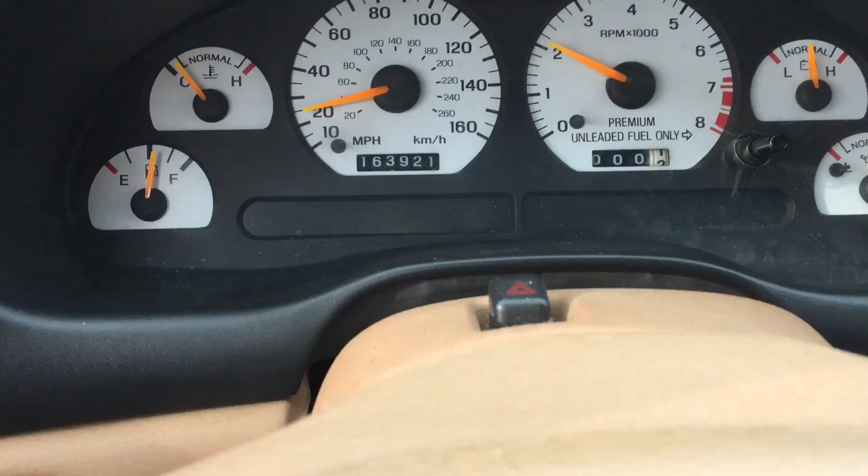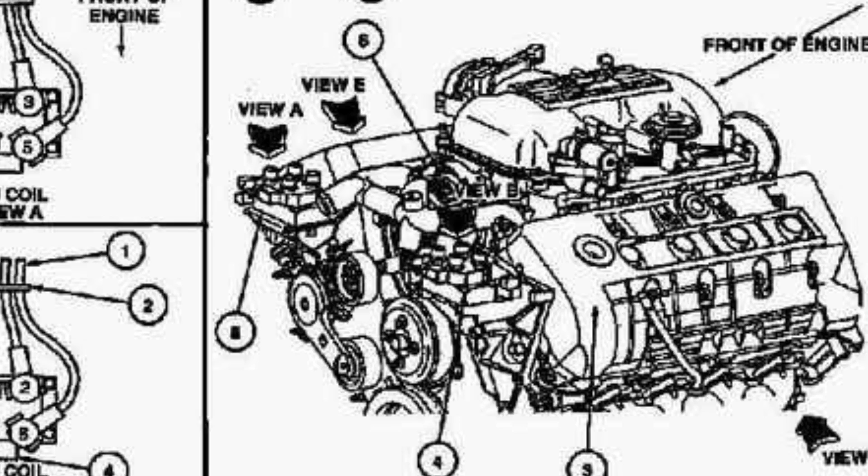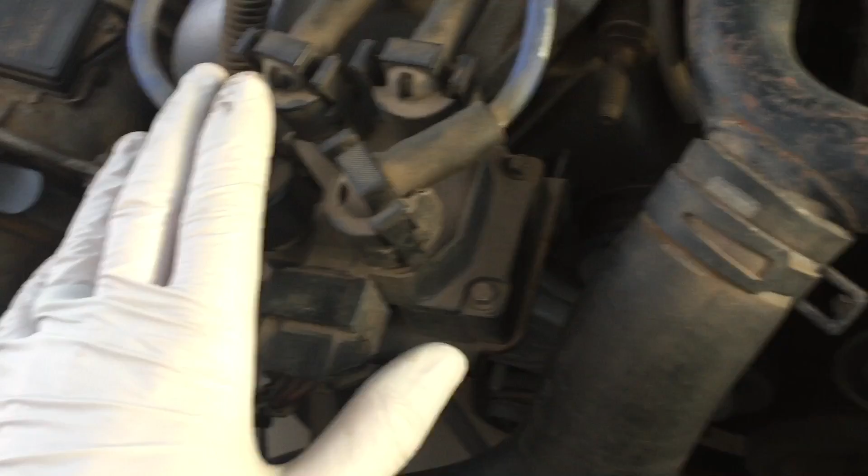Hey guys, Danny Johnson here, working on the 98 Cobra. I went to the owner's manual and a few references, looking at the coil packs mainly because if you paid attention to the last video, they use the same coil packs for both the driver's side and passenger side. So I thought, I wonder if he was using the correct side when he ran all the lines to the proper cylinders, because it can be confusing. The manual refers to it as the left-hand side, which would be the driver's side, but if you're looking in the engine bay, you might think the left-hand side is what you're looking at, which would be the passenger side.

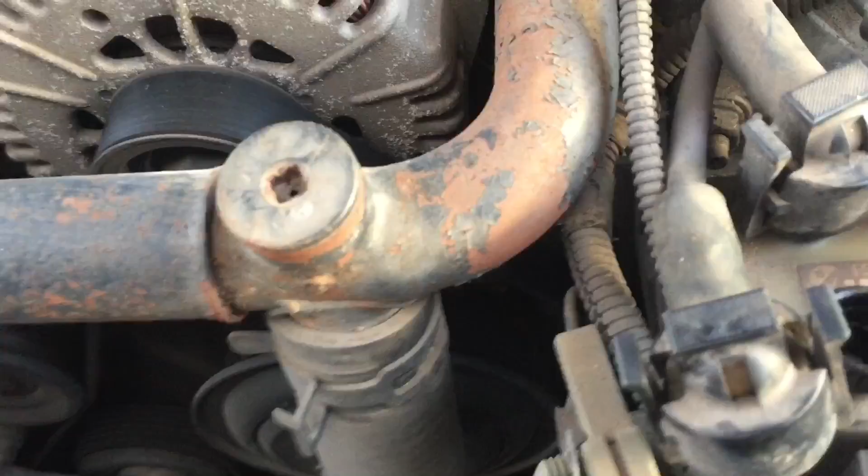So I looked everything over and it was fine, but that did lead me to look through the owner's manual, where I made an awesome discovery.

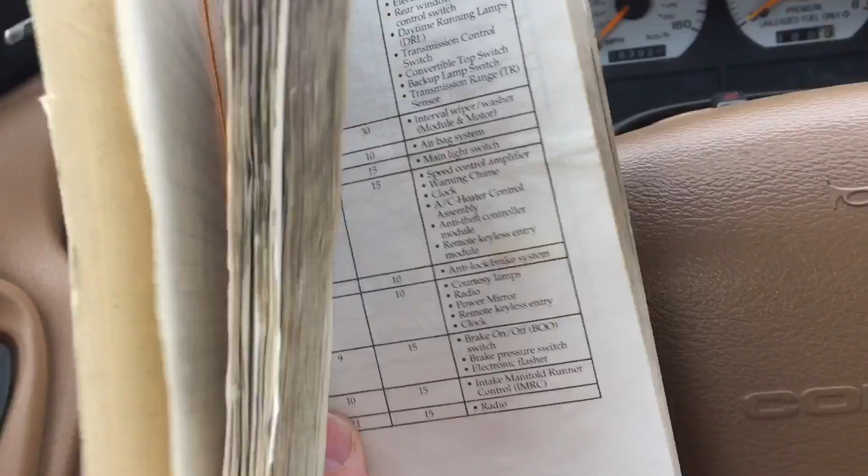Okay, really cool here. I have my 97 Mustang owner's guide from when I had my V6 Mustang. I kept this and it came in handy today. I flipped it open and looked at the fuse panel and its guide. As you may have seen in the other videos, I have this strange box down here. It looks like it might be an alarm system or something because there's a speaker. I don't know what the heck it is. But it had two add-a-circuits that were plugged into the fuse panel.

So sure enough, I went through and saw which two add-a-circuits those were running into. One went to the radio, which was not working, and now all it was, was the fuse. The amp just came on, so the Mach 460 works. That's great. And the other one was for up in here. This works now.

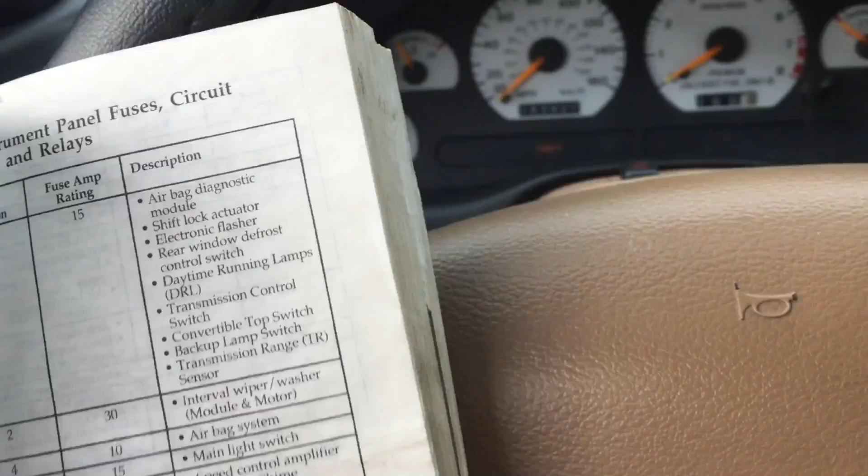Now looking at all this stuff, today just keeps getting better and better, and I mean that in a good way, I'm not being sarcastic. Because if you look at this one that was bad: courtesy lamps, radio, power mirrors, remote keyless entry, and clock. That's pretty much everything I was trying to fix the other day.

We got keyless entry now. That was the only reason that wasn't working, was that same fuse. And the window locks, everything's working there. We got our dome lights on. I mean, the radio, everything, just because this was tapped into our power supply using the add-a-circuit, which I'm familiar with.

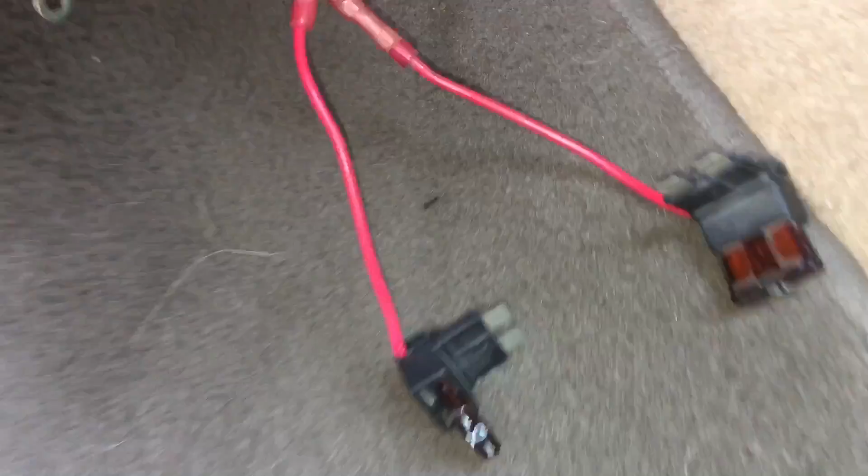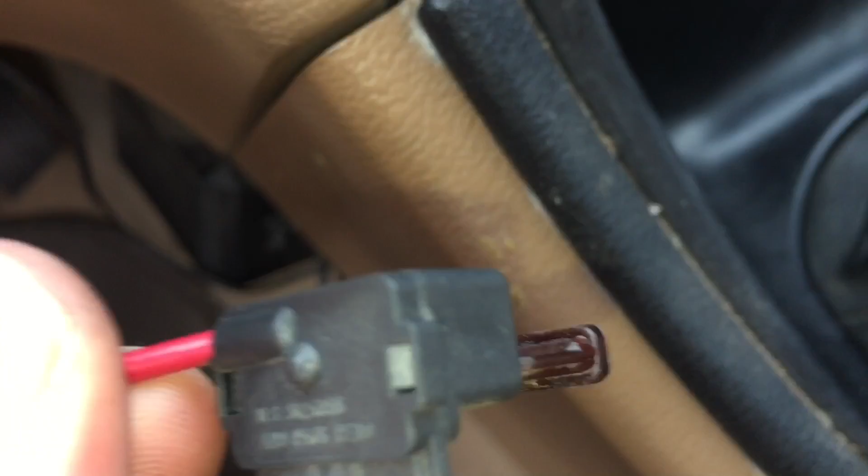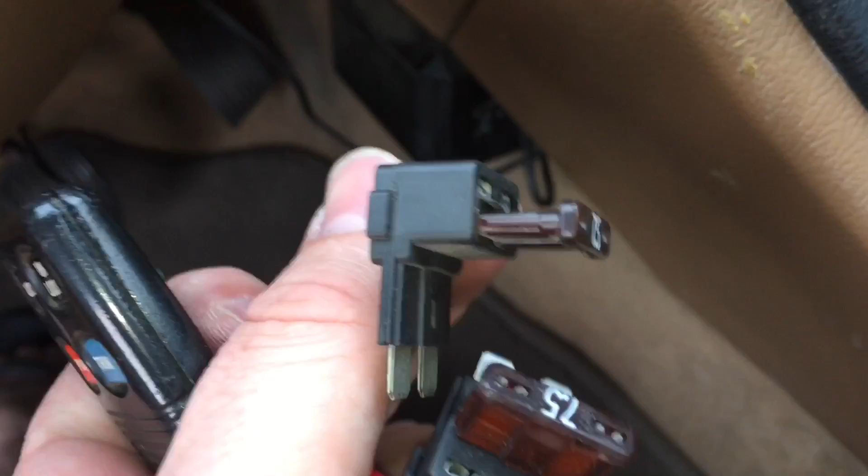But that's the problem - you burn out one of these. He actually had this backwards too, because with the add-a-circuit, where the wire comes into the circuit, that's the fuse spot for the accessory. So for example, he's adding in this, let's call it an alarm system. Whatever it is, when it comes in here, since it's at the top, that's where the fuse for that goes, which is probably his 7.5 amp. Where it burned out, this is normally like a 15 amp fuse to power the keyless entry and all that. So he had those fuses swapped, and just under the normal power of operating the keyless entry, it burned that fuse out.

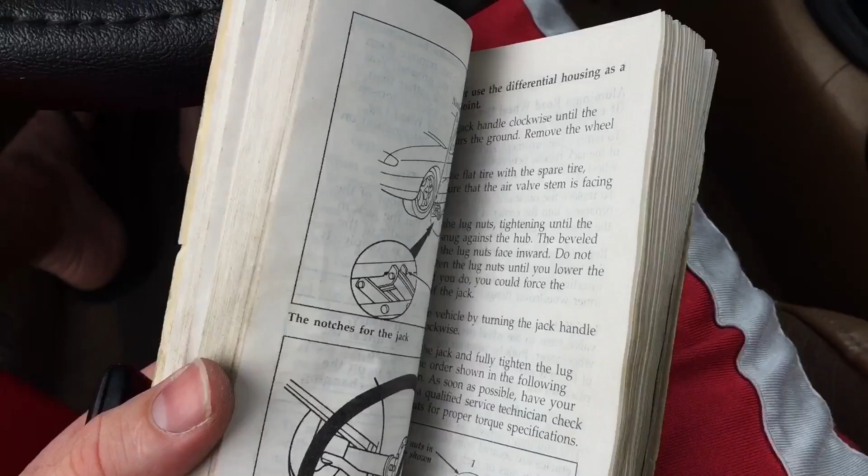Anyway, got a whole lot of stuff fixed, and the day is young. So we'll keep cruising through here. That's something maybe to do if you pick up a new car - start pulling the fuses and look up in here, see if anybody's been there and messed with something. Pretty exciting to get a lot of these things working now.

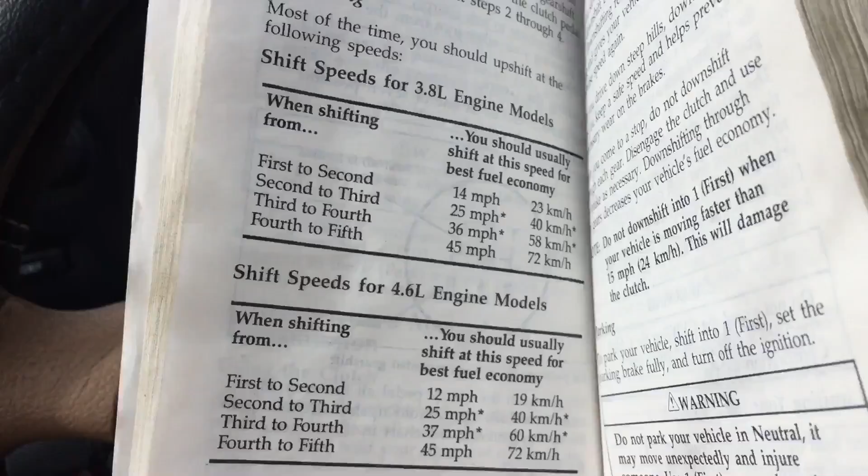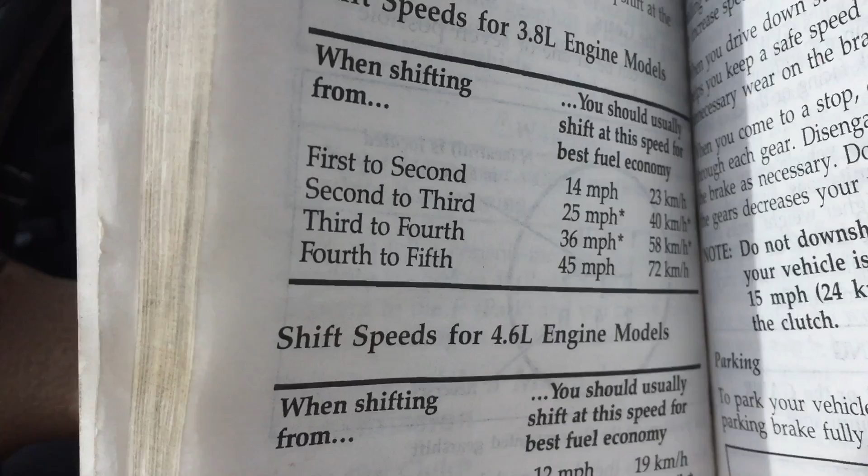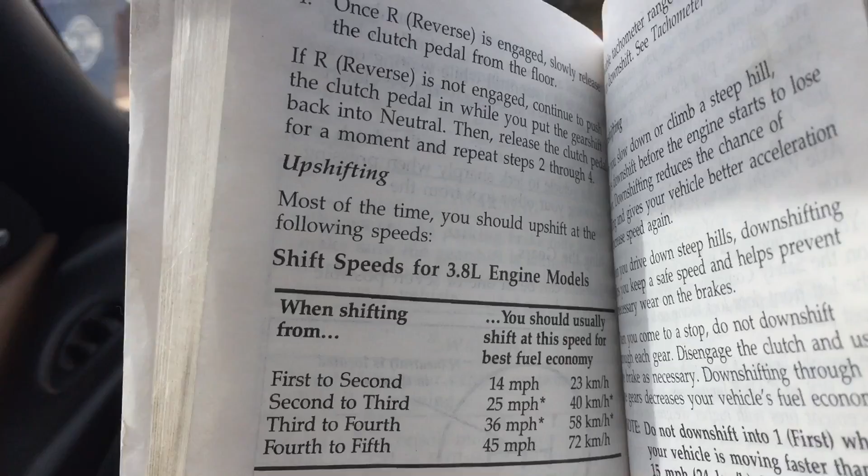This is going to bring back memories for my twin brother. We'll go through and have to read this together, but we used to sit here and study this. We had the 3.8 liter, so we were looking at when to shift gears first to second and all that. That was good for fuel economy, but we also would memorize at what RPM each gear ended, so that we'd know, for example, if we wanted our best bang for the buck at 40 miles an hour, we needed to be in second gear. So anyway, it's cool to read through this same book I used to read, always envying the 4.6 portion of it, and now have even the Cobra.

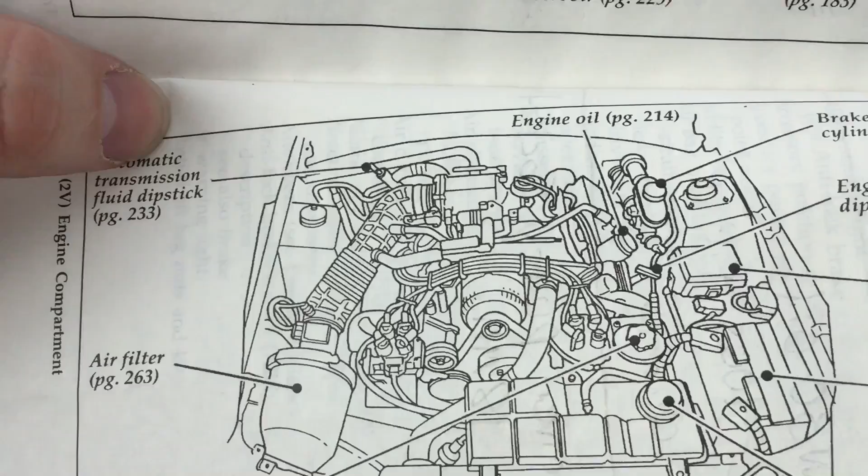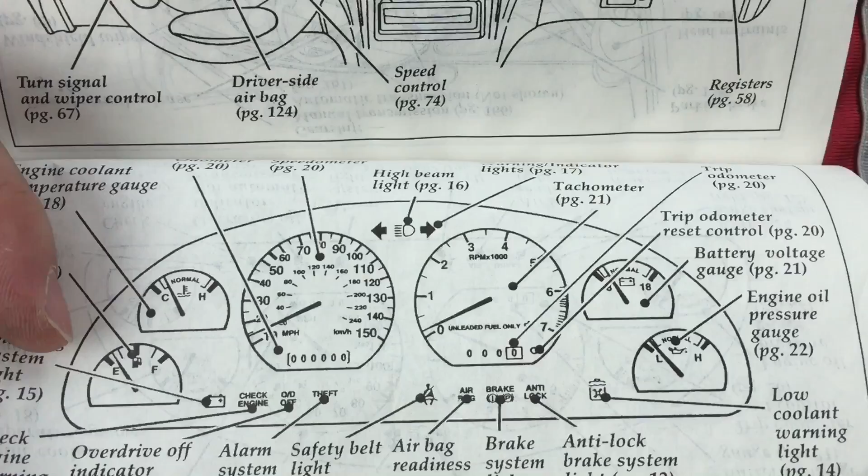We used to flip through these and look at the V6 engine and really envy the 4.6 2-valve. We'd flip through and look at the gauges, and man, we wanted those 150 mile an hour gauges like crazy with the 6,000 redline, since the V6 redlines at 4750 - it was a small redline, 120 mile an hour gauges. When we'd read through this book, we were familiarizing ourselves with the Mustang, and it was really cool. We'd even draw the horse and Mustang on the dash. But man, we envied the 4.6 so bad. So it's so cool to have not only the same almost year Cobra as our V6s, but also the Terminator and the Mach 1, and all these other cool cars.

All right, I am stoked.

Got the speedometer working again. It was that same fuse that was controlling the keyless entry, the power locks, everything that was tapped into by that stupid alarm system or whatever it was. So we're back in business.

Okay, so I have another one of these we'll swap out because this one's cracked. It's pretty simple, just get a screwdriver in here, and you just got to be very gentle as you pry this out, but go around on each side and do that. I'm going to be real careful. There we go, get all the bugs out of here too. Okay, and that's how you would switch these out - you just pull those right through.

I'll just show you how those work anyway. It looks like a fuse, but it's actually a light bulb. So if you have to switch those out, that's how you do that too. Just pull that bad boy right out, it gets hot pretty quick. Go ahead and line this right back up here. There we go, good as new.